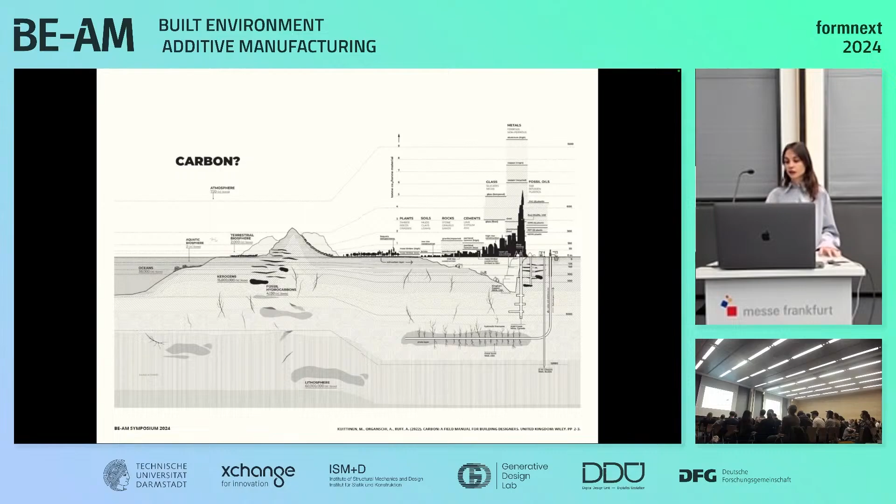And this is because in 2020, the anthropogenic mass, as it relates to the entire biomass on the planet, has already surpassed it. And this is, I think, really hard to conceptualize and to grasp, considering the immensity of the Earth and how we perceive the infinite natural resources that we have.

So in the 1900s, the entirety of what we built, like concrete and metals and asphalt and all the processed material on Earth, was 3% of the biomass. And in 2020, it was already higher than it. And in 15 years, it's going to be 3 times as big. So this is just to understand a bit how we're relating and what is our impact as a construction industry to it.

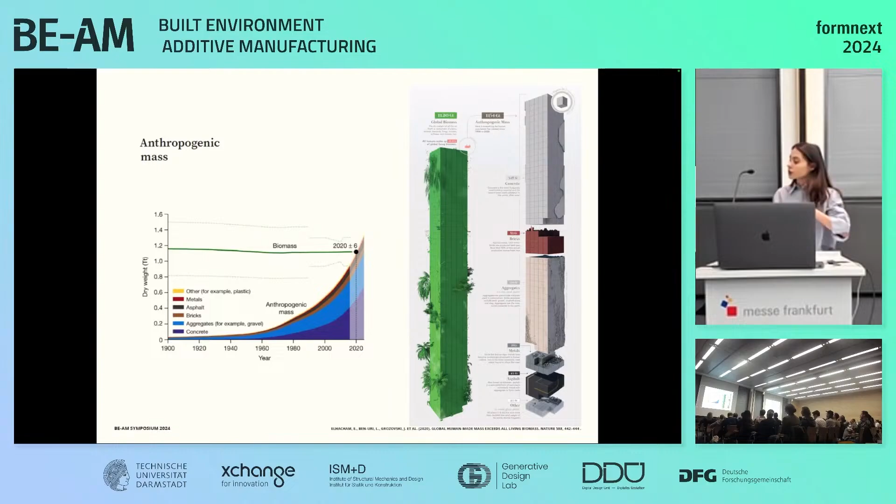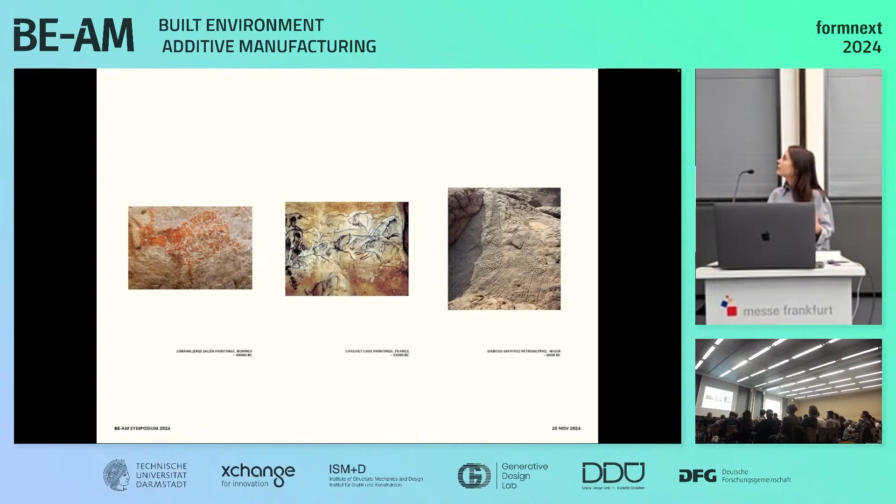Because with this biomass and the role of biology in mind, we can see that since the beginning of humanity, we have been influenced by it and fascinated by it. Even in our early dwellings, in the caves, we've been painting animals, and then throughout ancient history, motifs of animals and plants have carried through the acanthus leaf and the Corinthian column, then Art Nouveau vegetation,

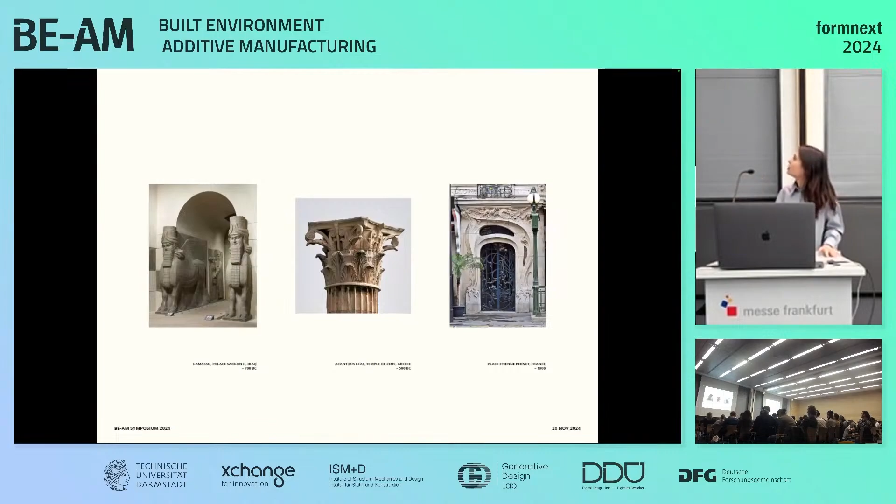and Baroque. Up to the current times, where we move from biomorphism, which is just copying in 2D or 3D vegetation or animals' biological systems, to getting inspired by the function. So in biomimetics, these are some examples, we're looking at taking functions from biological structures and applying them into building systems.

And while this is interesting and it is a step further, it is far from the potential that we can achieve by really understanding and taking on what biological and natural systems can do in our built environment. And while we've seen examples of implementing biological systems at large scale, I think there's a lot of potential in the material systems as well, and especially at all scales.

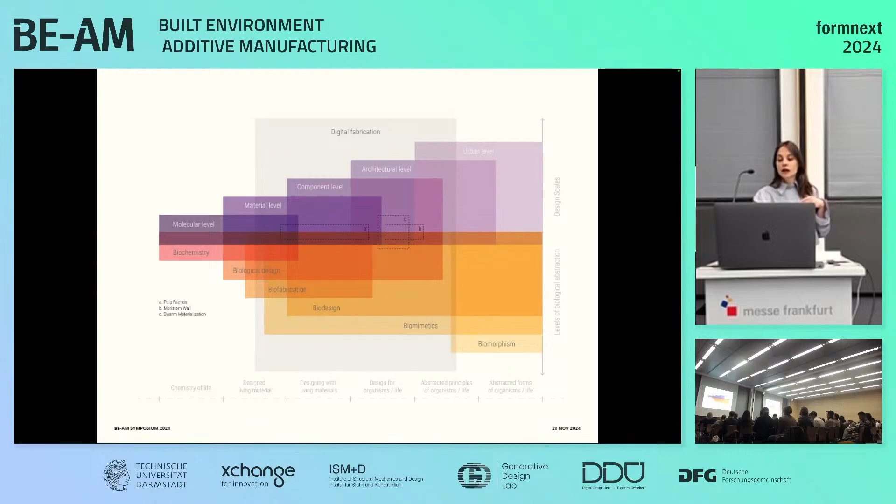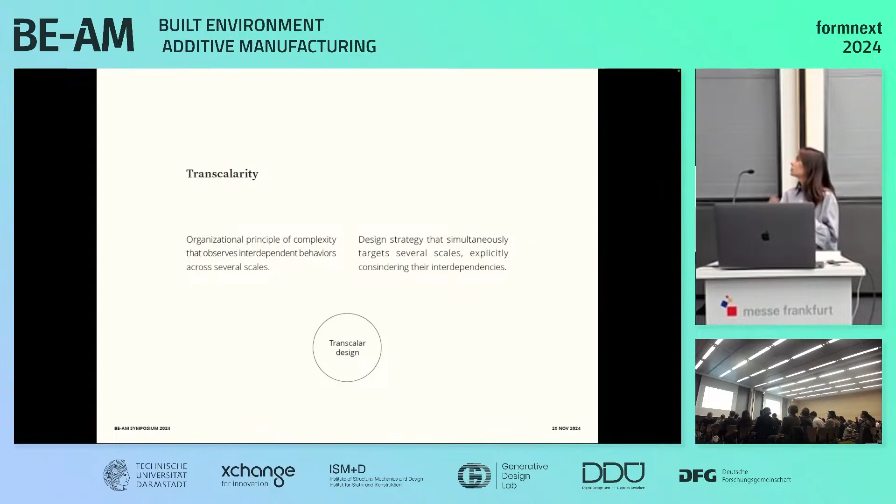So how do we work with multiple scales, and how do you address these issues at the same time? This is the concept of transcalarity, which I developed during my PhD: an organizational principle in complex systems that observes interdependent behaviors between scales. But it is also a design strategy that targets several scales simultaneously while considering the interdependence.

So the journey of my PhD started in Namibia, where together with David Andreen, we went to study termite mounds. And this is because they're a really amazing example of transcalarity and how behaviors at lots of different scales stack up and create a highly exquisite superorganism that has really impressive function.

So we studied the termite mound physiology in 2 ways, looking at the geometry and function, and then at the materiality. Of course, ideally, these are interconnected, but they just had different focus in 2 different projects. So the first one is Meristem Wall. And here we 3D printed a building facade at full scale.

And this is inspired by the termite mound wall, because it is sometimes believed that termite mounds act as thermal regulators, that they modify the thermal environment inside versus the outside. That is not actually the case, but they act as if they are the lungs of a large organism, to breathe the metabolism of all the termites that live inside.

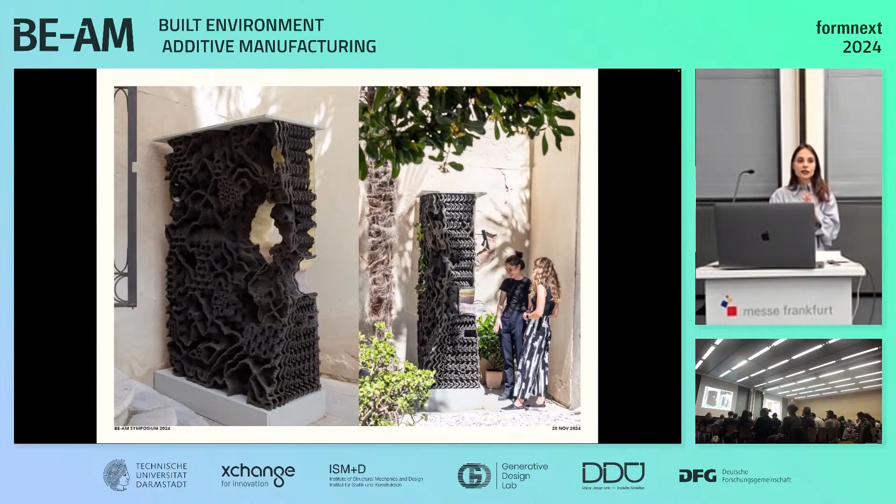And this project was exhibited at Venice Biennale. But another way that we looked at this, the functionality and the way we've got inspiration from the termite mounds, is the material of it.

Because the termites themselves, they don't have a digestive system that can break down cellulose. So what they do instead is they've made a symbiosis with a species of fungus called Termitomyces, which lives inside the mound. So the termites harvest plant matter and bring it inside the termite mound. And here there's a species of fungus that slowly breaks down the material, so that both the termites and the fungus can digest and live off of it.

And this is why I'm talking about this, because it's quite an interesting material. It's quite lightweight, it's hydrophobic and pretty strong considering its weight. So we started here to see if we can replicate it and what can we learn from this system.

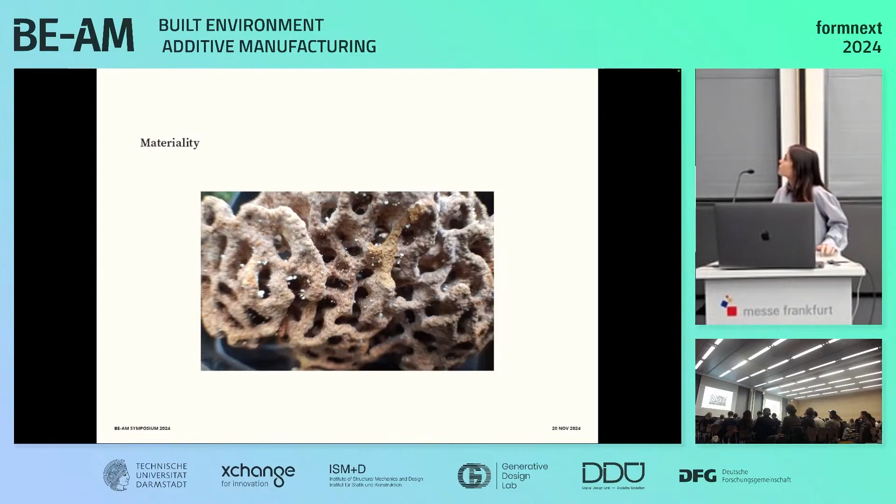And it is interesting because it is built additively. So the termites add it one piece at a time, and this structure ends up negotiating a lot of different needs. So the need of the fungus to breathe, to have access to oxygen, the needs of the termites to access it for deposition and removal, and of course the aggregation of the plant matter.

So then what we did, we went to Namibia, as I said, and we opened a termite mound and took lots of samples from inside of it, and then smuggled these samples in a toiletry bag and brought it home to the lab, and then we isolated. And we also managed to get the original fungus that lived inside there. And then we've added the substrate for this, which is plant fibers. In this case, it was cellulose and wood chips, but lots of different substrates are viable.

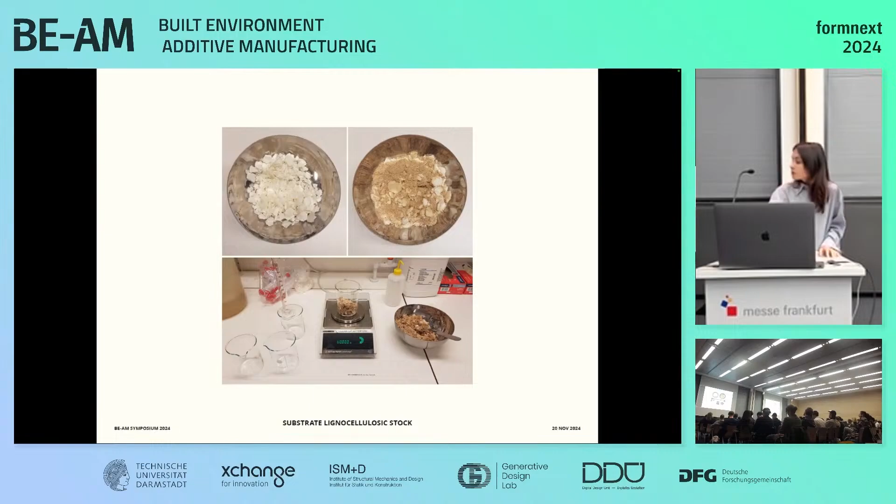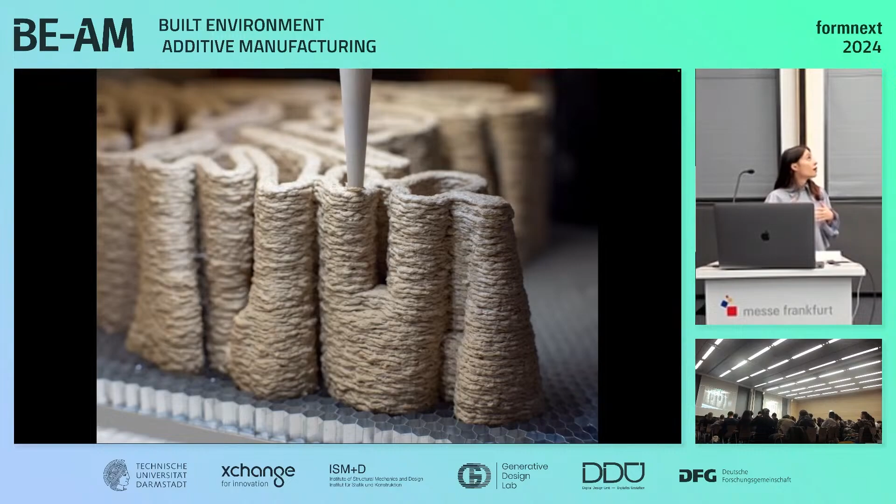And then we 3D printed with it. So at this stage, this is essentially a wood-based 3D printing, which in our case was a very soft, wet material that on its own didn't really have much stability. But after the 3D printing, there goes a growth stage. And this is where you can see in the middle, the fungus grows on the surface, and through the mycelium, which is the root network of it, essentially binds the material together.

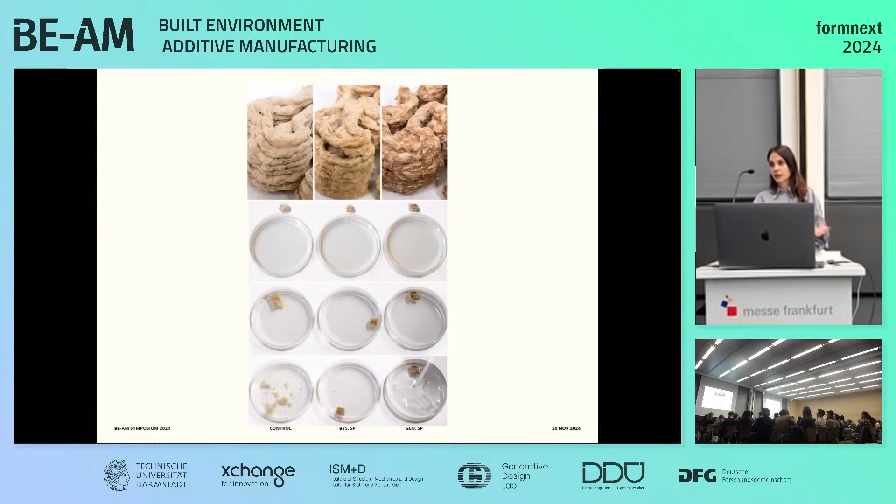And what is perhaps even more interesting is that it not only acts as essentially a reinforcement of the wood particles, but it's also changing it at a chemical level. So you can see from the control, our main species that we ended up working with, even after being submerged for 24 hours in water, it doesn't decompose. It maintains its mechanical integrity because it is not just wood pulp anymore.

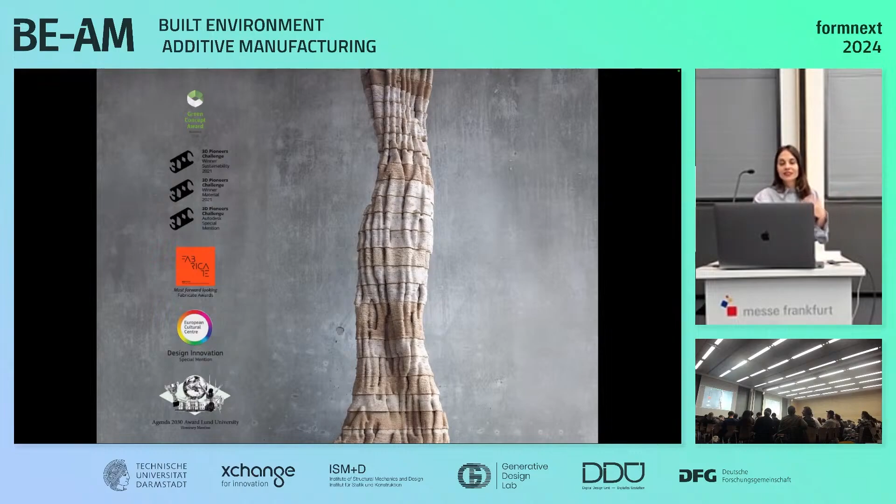And so we took this material system and put it together in a full-scale 2-meter column to scale up the process. So this project we started in 2017. So it's quite some time ago that we've been trying to address these issues.

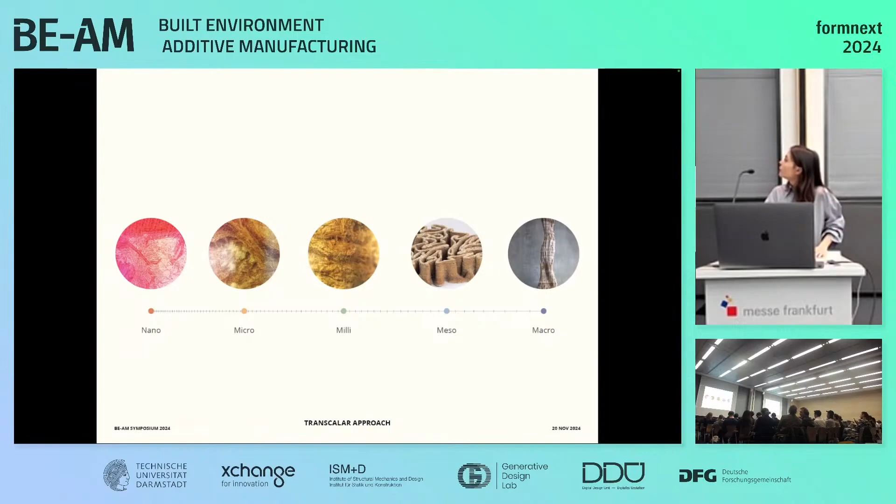So I think what's important to get here is how working with a living organism really forced us to try to address the different scales, because you cannot work at one and then expect it to just solve itself across the different scales. We needed to negotiate the needs of the fungus, which meant increasing the surface area, because we wanted to maximize the enzymes that were secreted by the fungus. Because the more enzymes are secreted, the higher the transformation rate of the material. So understanding what happens at the very small scale, molecular level, down to negotiating.

So here you can see how we maximize the surface area so that the fungus has access to oxygen to breathe during its growth stage. And also this helps for desiccation, to ensure more even drying with no cracking or less deformation. And these are some of the parameters that we worked with, spanning the printing parameters, extrusion, to the material composition, to have it both extrudable but also biocompatible with the fungus. And then, of course, the design parameters. So all had to be negotiated somehow simultaneously.

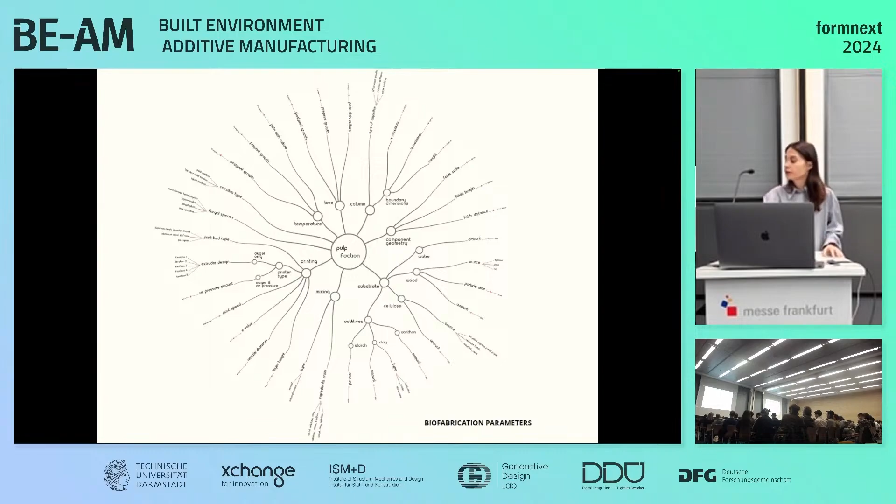So to conclude, it is clear that we need, of course, lots of different strategies for addressing the current state, but the material rethinking and how the material integrates with the design, I think it's really relevant.

Yes, and I think, of course, it's not easy to work through all the scales simultaneously. But I think that now we've reached a point where we can do this, both because of the computational power that we have access to and the tools of fabrication that can materialize these intricate interdependencies that we have.

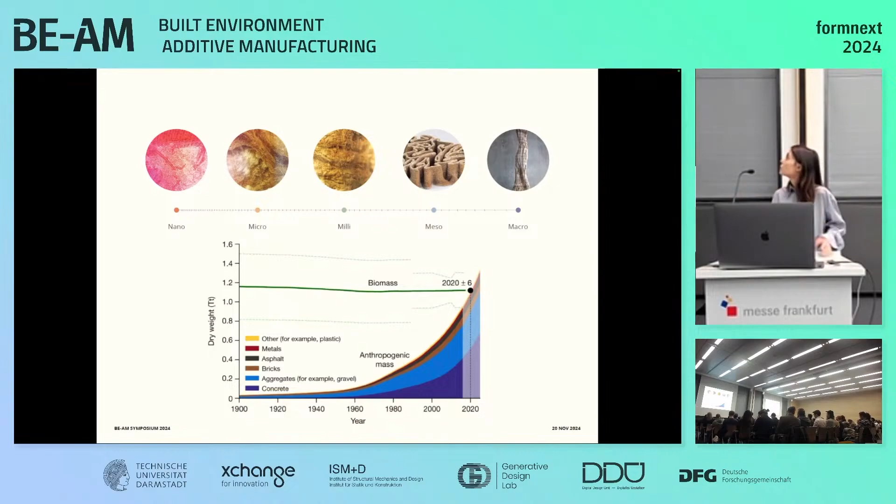And also, I think it's really important to work across disciplines, because only like this can we bridge the different needs from the very small material scale to global scales of material flows and information. So yes, and this is a project that was already completed. So right now, I've started my postdoc at Kassel just last month.

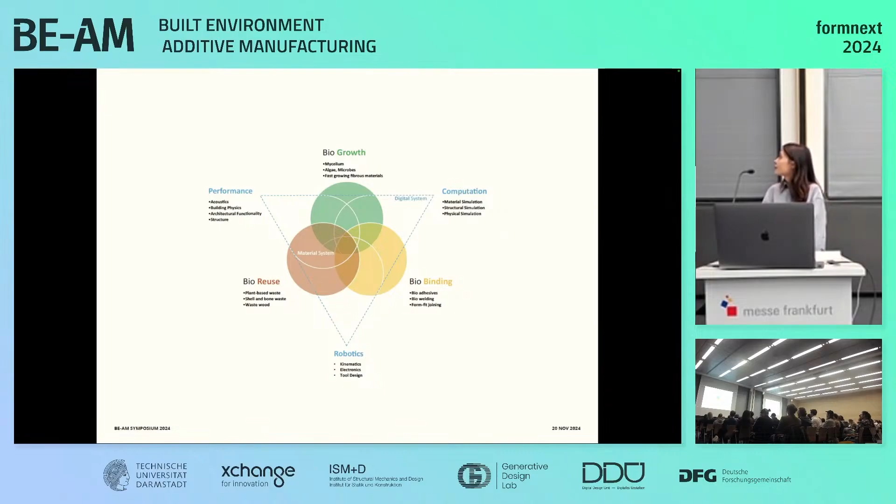So now we're in the process of scaling up these biomaterials, so testing different materials, testing different species of fungi and bacteria, and then also we're building a lab that has both the capacity for microbiology and for architectural large-scale prototyping. Because these interfaces are really important to be able to create these kinds of projects. So yeah, this is where we're at. So stay tuned for the next project.

Thank you. So hands up.

Thank you. Again, a very interesting approach. I'm curious, how do you envision the longer term usage of these parts? Does the mycelium continue to grow? Is it sterilized at some point? How do the material properties evolve over time as the ratio between mycelium and wood changes and things like that? Lots of open questions there for me.

Yes, these are very good questions. I don't think there is right now the one answer for it. What we've done in this case is stop the growth by drying and killing the mycelium, because even as it is, bringing mycelium into housing raises some issues. So at least if you can say it's inert, this is one way to keep developing and not have too much pushback from users and the industry.

But I think there are ways in which the fungus can be kept maybe inactive, but still alive. And I think this depends a lot on the conditions of growth and the fungal species. So there's a lot of parameters that need to be discovered and put together. But in this case, it would really help. It would bring even further benefits, such as the capacity to self-repair, right? Like we have examples of concrete with bacteria that when it cracks, it can be regrown.